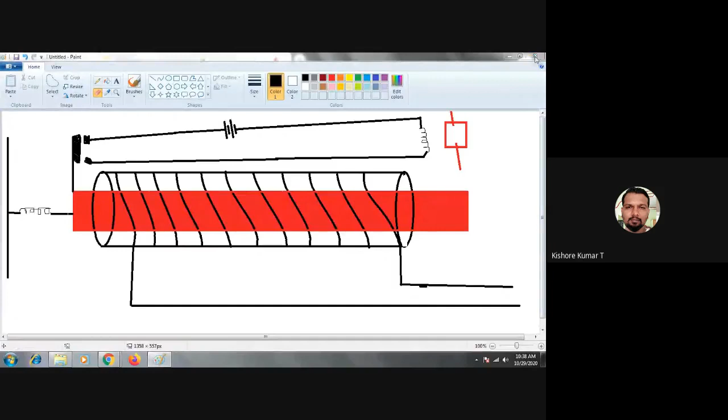And moving to the next one, balanced beam relay. Balanced beam relay. You can see here,

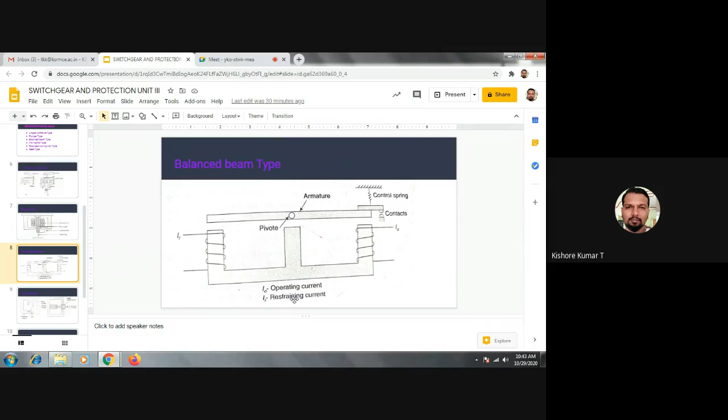Yes, sir. Okay. And coming to moving coil type. So you all know very well about moving coil type.

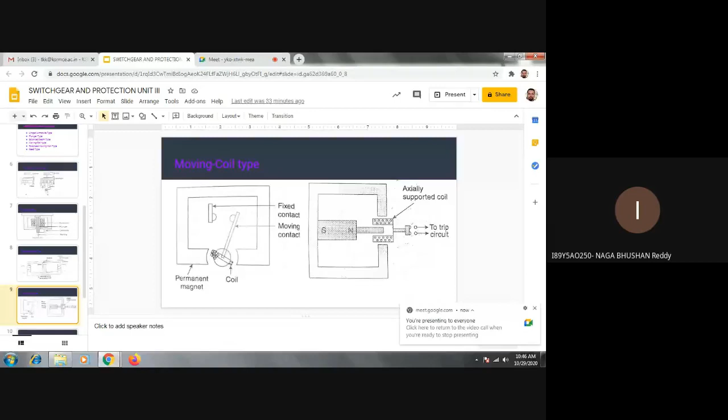So this is a coil which is moving there. With the movement of this coil only, we are closing or opening the contacts of the trip coil. Okay, fine. So here there is a permanent magnet, which will always set up some flux. Let us imagine the left pole of the magnet is south pole and the right pole is north pole. We will assume that the magnetic lines of force are directed from north pole to south pole.

So under normal operating position, this coil, you may consider it an armature, will carry some current which provides a space between these two contacts. To this spindle on which the coil is suspended, a soft bar is projected like this to which the contact is attached. So the moving contact is separated from the fixed contact under normal operation.

So whenever the actuating quantity enters here, a force will set up such that this coil is rotated anti-clockwise. An arrangement is made such that this coil is rotated anti-clockwise. This rectangular shape represents the coil. So whenever this is rotated anti-clockwise, what happens?

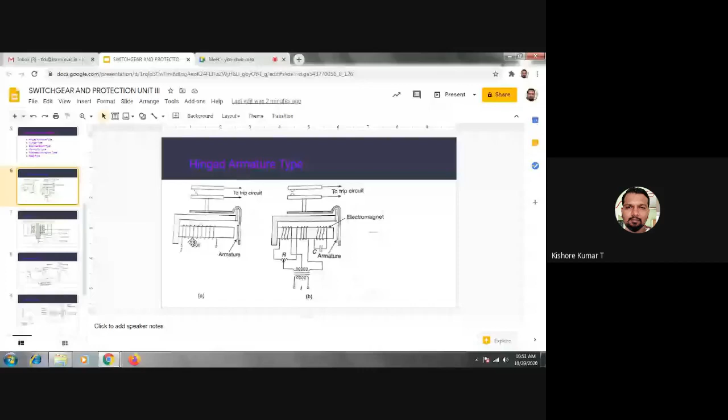Magnet, fixed magnet or permanent magnet. So what does this permanent magnet do? It will always arrange this magnetic field to attract

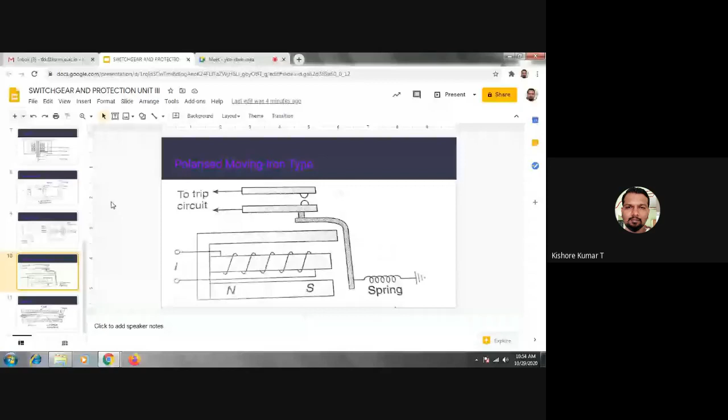And coming to the next relay, reed type relay. Reed type relay.

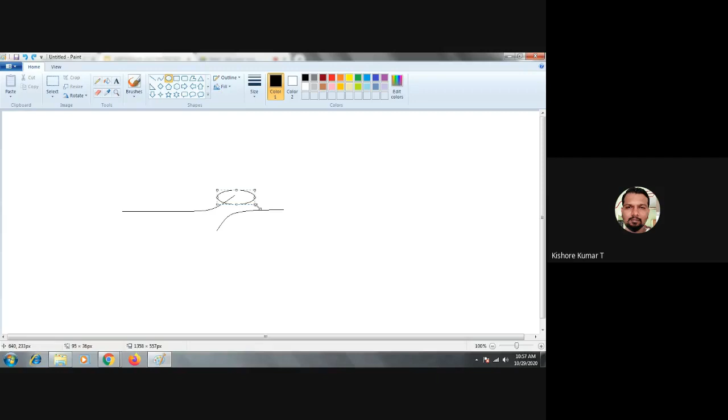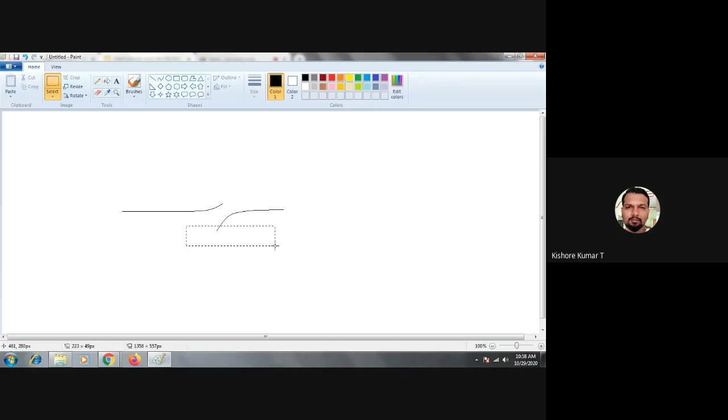You imagine this as a sealed glass capsule. These arrangements are made here, and there will be a solenoid around this sealed glass capsule. That solenoid will be having conductors. Like this, it will be having conductors on it.

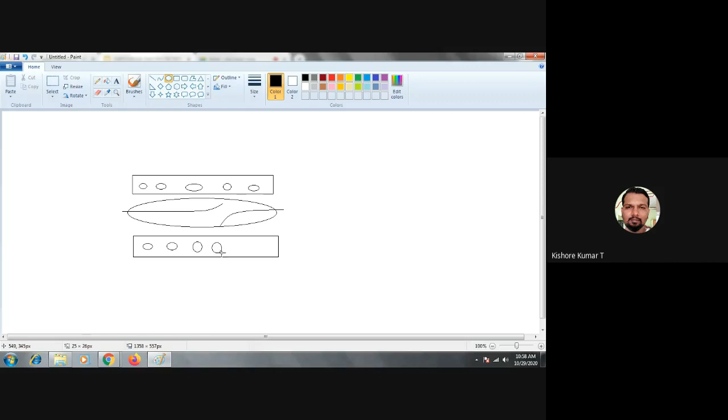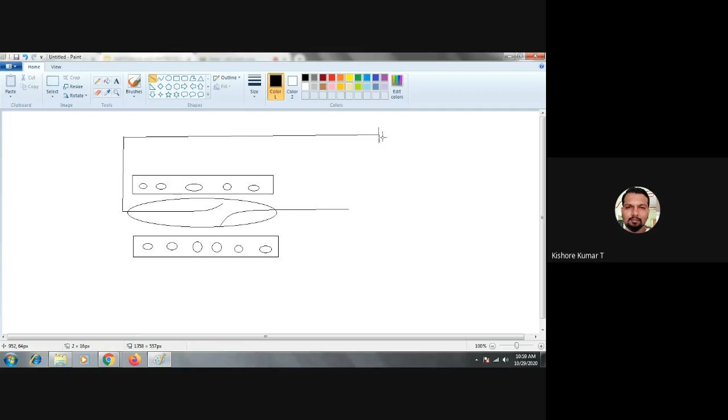So whenever current flows through this solenoid, what happens? This solenoid will be energized by the actuating quantity, and the output contacts of the reeds will be given connection to the trip coil. From here, it is given connection to trip coil. So initially, the trip coil contacts are open, while the reed strips are separated from each other. Since the reed strips are separated from each other, this trip coil will not be in a closed mode.

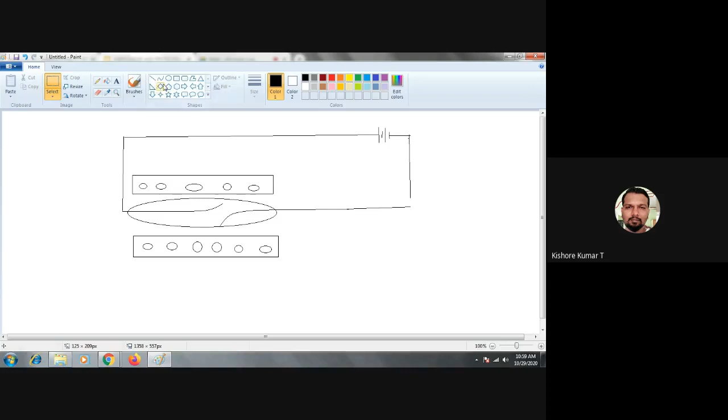Imagine there is a coil here.

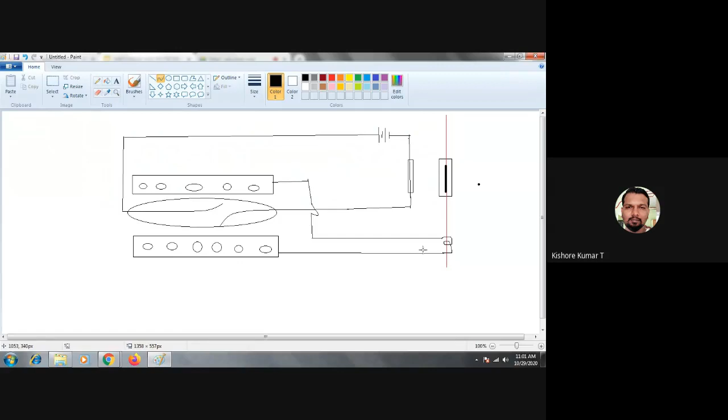Initially, under normal operating conditions, whatever may be the flux set up by the solenoid is not sufficient enough to close these contacts or attract these reed pieces. So thereby, these two reed pieces will be separated, lying under open contact mode. So whenever these two are separated, this trip coil circuit is in open circuit position under normal operating condition.

So whenever fault occurs, the current drawn by the line gets increased, due to which this CT will measure more magnitude of actuating quantity, and the magnitude of actuating quantity delivered to the solenoid increases, and the force set up by this increases, due to which the reed pieces will get attracted towards each other. That means the top reed will be attracted like this, and the bottom reed in this direction. So this one is coming downward and this one is coming upward.

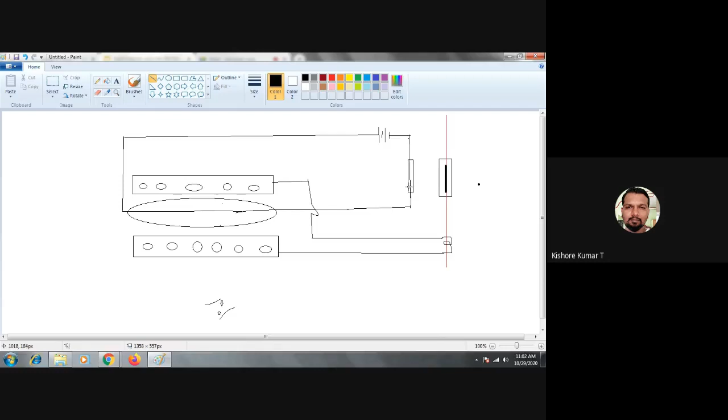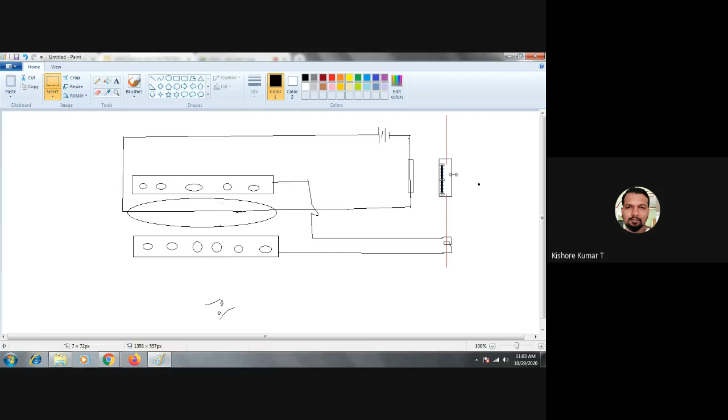So when these are moving like that, these two contacts will get closed. So whenever these two contacts are closed, the trip coil circuit will get closed, and there is a battery which drives the trip coil. Trip coil gets energized, and then this breaker contact opens the line. So this faulty section will be separated from the active section. This is how a reed relay is going to work.

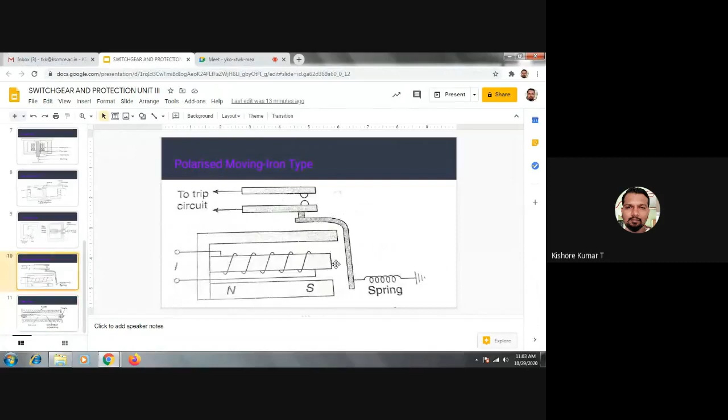Okay, so this is enough for today's class. So one classification has been completed: attracted armature relays. So next we will go for induction relays. In induction relays, there are disc type relays, cup type relays, printed disc type relays, like that.